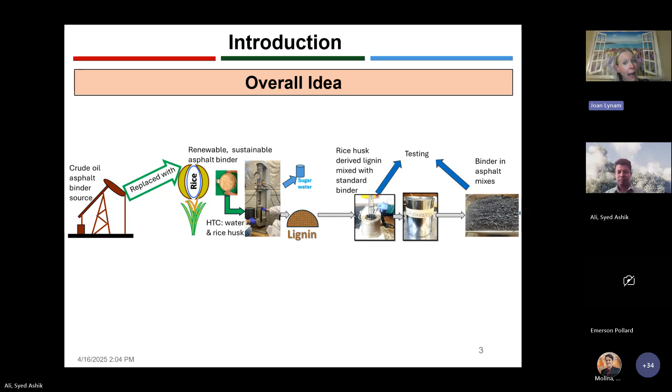The lignin part of the rice husk was then mixed with standard binder and then put in asphalt mixes. And both of these were extensively tested. So that's kind of the overall idea of what we were doing. You can keep going.

So approximately 94% of the roadway infrastructure is asphalt. All right, so that's a lot, really. And usually it's made from crude oil binder. The binders are made that way. It's kind of unsustainable and detrimental.

Eventually, fossil fuel-based asphalt binders are going to be an issue because we're going to run out of fossil fuel. And then at that point, costs will rise up quite a bit. And so we're looking for viable alternatives that are more sustainable. And you can go on to the next one.

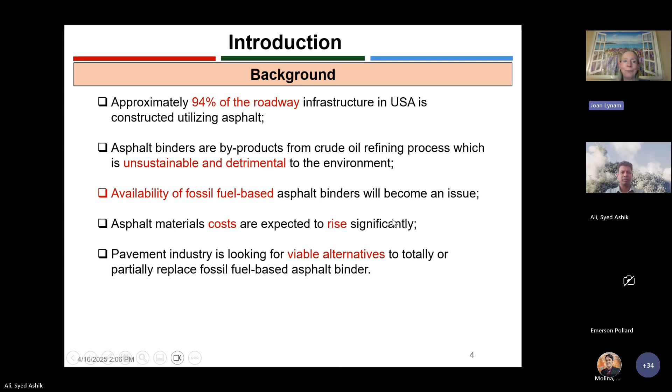So this is different things that people have suggested to replace asphalt binders. One is waste cooking oil by those studies that you see under the reference, and it had some positive things about it. However, you can make waste cooking oil into biodiesel, so there are other things you can do with it. Algae, it had some positive things, but it did tend to have phase separation if you put too much in.

There's natural rubber and latex, and they had some positive things and some negative things, as you can see in the study by Wen. But natural rubber is eventually going to be a problem in our world. The fungus that killed off the rubber trees in South America will eventually probably migrate to Eastern Asia, where rubber trees make latex now. And so that's going to eventually be a problem.

Biochar has also been suggested, and it has its advantages. Cellulose-based fibers also might be useful, as you can see. However, cellulose you can use for a lot of different things, like paper. Really tiny charcoal ash from coconut shells also had kind of a good impact on properties of binder.

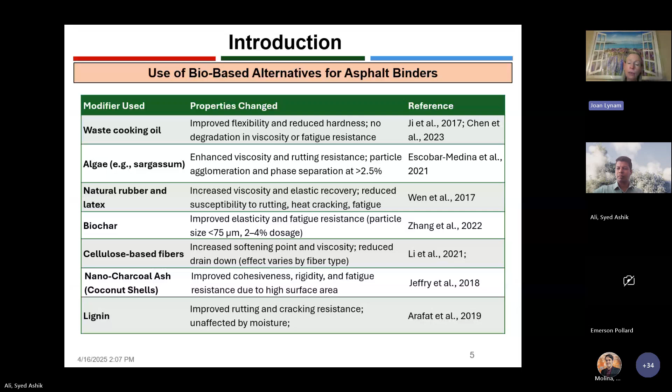But we're mostly interested in lignin. The study by Arafat et al. was actually done at Louisiana Tech with Dr. Wasiuddin and his student and me. And so we were kind of one of the initial papers that actually said, look, you can do this with lignin. So you can go on the next one.

All right. Now, lignin is the second most abundant form of biomass. Now, biomass is just plants, pretty much. So it's the second most abundant form on Earth after cellulose that you make paper out of. And about 50 million tons of lignin are generated from pulp and paper industry. The thing about that is much of this lignin becomes what they call black liquor, and they burn it in their own facility. So it's not necessarily available for us to be using it.

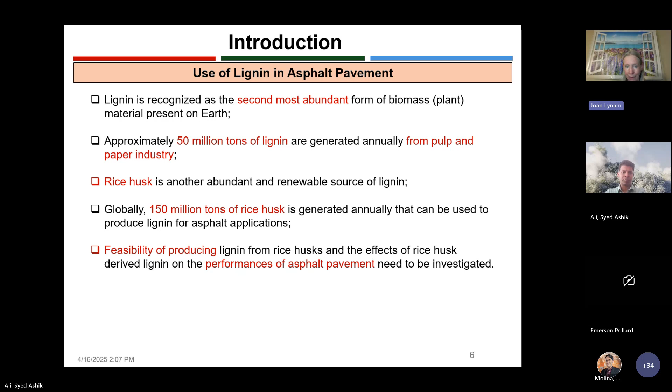And rice husk is another pretty abundant source of lignin. You can see how many million tons of rice husk are generated annually because rice is grown around the world. It's the second biggest crop after corn. So we were thinking about how can we feasibly produce lignin from rice husks, and what will happen if we put them in as a binder in asphalt pavement. All right, we can go on the next one.

Okay, so this is the three major steps. You can see at the picture on the left, that's what it looks like after we do hydrothermal carbonization on it. But there are three steps: pretreatment, extraction, and purification. And the pretreatment can be physical, chemical.

Oh, is there a laser pointer? Oh, that's nice, but I can't point with it.

That's okay though. So you can use acids or bases. You can use physicochemical like steam explosion. So basically you put it and then you change the pressure, suddenly explodes the biomass so that the lignin can be separated. And finally, biological ones. White rot fungi actually can dissolve lignin, but it takes a long time if you do the biological methods. So typically chemical methods are more used, especially in pulp and paper.

You can also do things like organosolv, other hydrothermal processes, acids and bases, and ionic liquids, which I worked with some to make lignin, but the lignin's going to have different properties. Okay. All right. So we're excited about hydrothermal carbonization in my lab, obviously. It just uses water and biomass. So that makes it simpler than many kinds of chemical pretreatments.

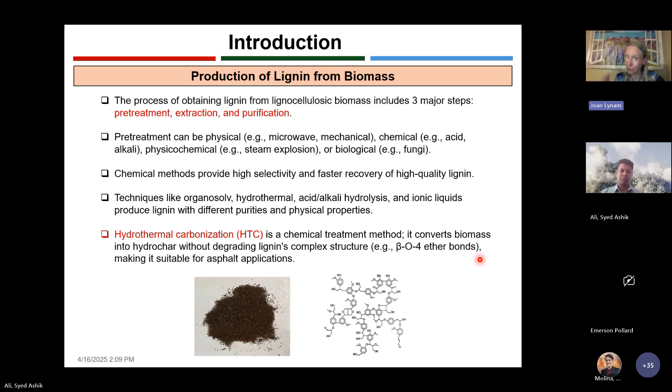And it can take out the cellulose, changing it, as I mentioned before, into glucose, because cellulose is just a bunch of glucoses all lined up. Or hemicellulose, it has different sugars in it too. So you get sugar water out of it, and then you have your lignin, but it doesn't tend to break the bonds, especially the beta-O-4 bonds in lignin, which you can see in the chemical structure on the right. Lignin is pretty much a bunch of benzene rings that are connected in different ways to other benzene rings in a three-dimensional matrix. So that's pretty much what lignin is looking like. If you want to go to the next slide.

Nice thing about rice husks is they aren't really useful for anything. They either get burned in the open field wherever they're produced, or else they get landfilled. Animals won't eat them. Okay, so they're not really useful for anything else. So they're a real kind of a waste, and a large quantity waste.

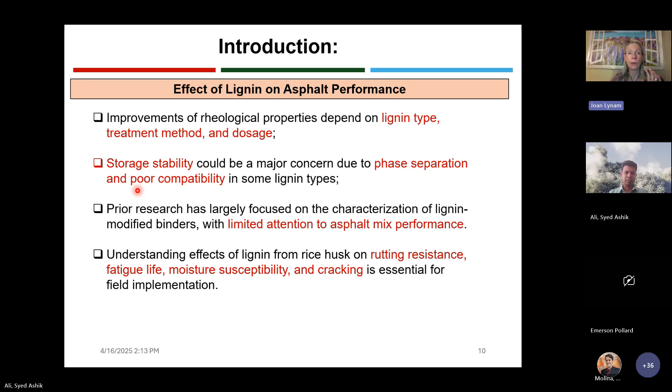So we wanted to study the whole gamut, starting from how we got the lignin to what happened when it was in the binder to what happened when it was in the asphalt mix. So that was what we were excited about studying. So we can go on the next slide.

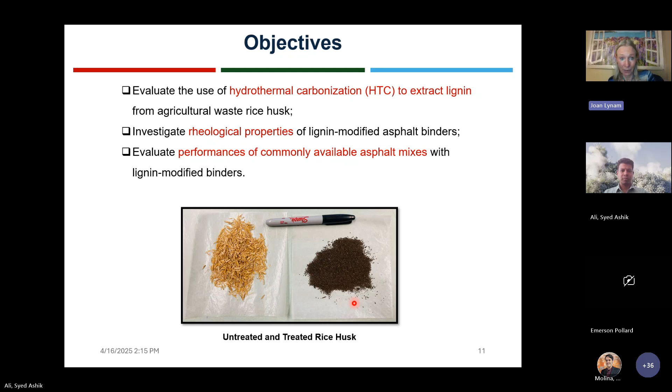All right, so we wanted to do HTC to extract lignin. We wanted to look at the rheological properties and the mixes, just as I said before. The picture you see on the left is what rice husks look like when they're not treated. And then on the right, you can see what it looks like after they're treated by hydrothermal carbonization. So we can go on to the next slide.

And the reason is because this is water at 250 degrees C, which is way above the boiling point, and it's also high pressure. And so that's why you still have liquid water in the process. Then we characterized what lignin we got out of it. We looked at the lignin content, how much lignin we got out of it.

We looked at the fuel value of it. We did some FTIR, or Fourier transform infrared spectroscopy on it. We checked on the cellulose content and the carbon content.

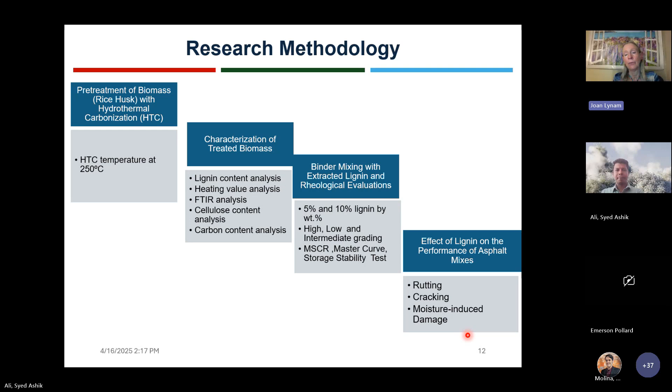Finally, we replaced either 5 or 10% of the asphalt binder with lignin. And we did a lot of testing, high, low, and intermediate grading, MSCR, master curve, storage stability, and that sort of testing. And we did rutting, cracking, and moisture-induced damage testing. And this, Dr. Ali is going to talk more about. So we can go on.

So this is kind of what it looks like, the process. We add water to rice husks with 10 times as much water as the rice husks. Okay, so we weigh it, we put it in a glass liner. We put the glass liner in our reactor, which you can see on the top right. You can see some of my students doing it.

So that's what the PAR reactor looks like. It's a 2-liter reactor that we use. It has a stir and it has a controller to make it go to a particular temperature. It also has a pressure gauge to see what kind of pressures we're ending up with.

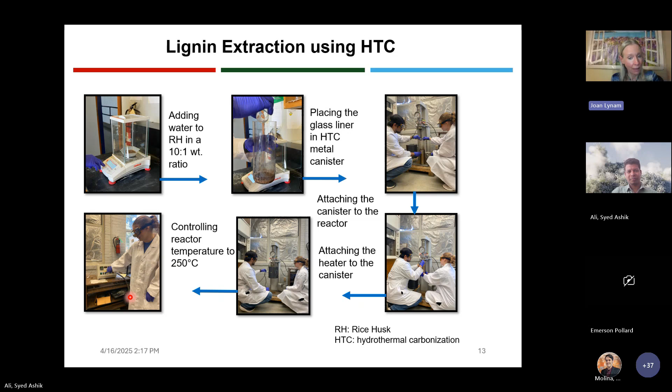We then add the heater. There's a heating jacket that goes around the reactor to heat it up to 250 degrees C. And on the bottom left, you can see the controller. So that's what's happening in that picture. We can go on to the next one.

We do what is called fiber analysis. Fiber analysis basically figures out how much cellulose do we have in our biomass, how much lignin do we have in our biomass. That's kind of what it does. And it's a protocol from the National Renewable Energy Lab. So first we take our product, our solid product. We add 3 milliliters of sulfuric acid to 0.3 grams of it.

We then put it into a 30°C hydrolysis bath for 1 hour. We then autoclave it in our autoclave at 121 degrees C for 1 hour. We then just weigh how much solid we have. The solid that we get is called acid insoluble lignin, okay, AIL. And that's because we put it in the acid and it did not dissolve. So it's the acid insoluble lignin.

And then finally, we take the liquid that was there and we analyze it with UV spectroscopy for acid soluble lignin. So it's the stuff that dissolved out. So that's how we are characterizing our lignin. And we also, yep, you can go on.

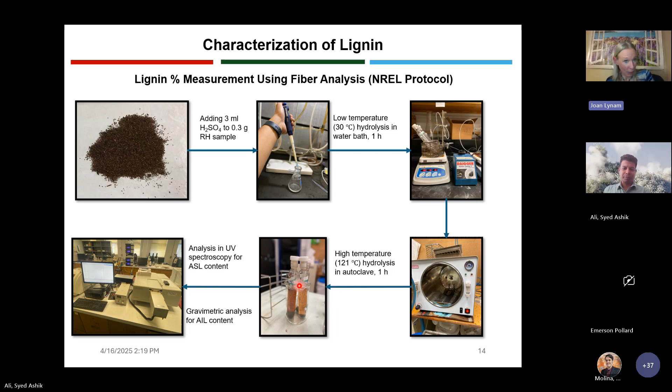Thank you. We then did Fourier transform infrared spectroscopy of it, which can be a little bit hard to figure out, well, gee, there's a squiggly line. How do you analyze this? How we analyze it is we figure out the lignin to cellulose ratio. So at 1515, that particular peak, if you take the area of it, you can then divide that by the areas of a number of other peaks and that will give you what kind of lignin to cellulose ratio you get. So that's how we analyzed it.

The untreated one is the green one. The treated one is the blue curve. And so we calculated those things and we found that in rice husks, if you don't treat them, the lignin to cellulose ratio is about 0.4. All right, but if you do treat it, you get about a 0.95 lignin to cellulose ratio. So it proved basically that we took out the cellulose from these rice husks. So we can go on to the next one.

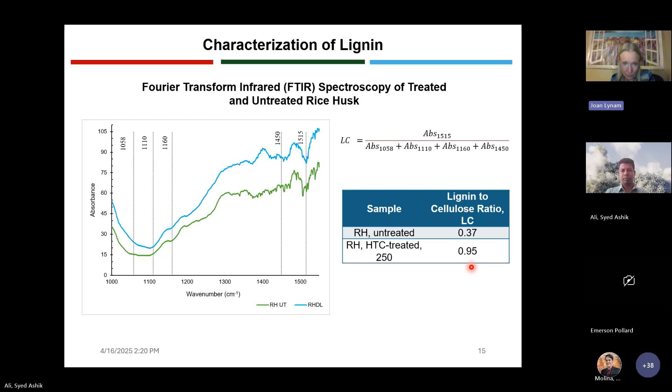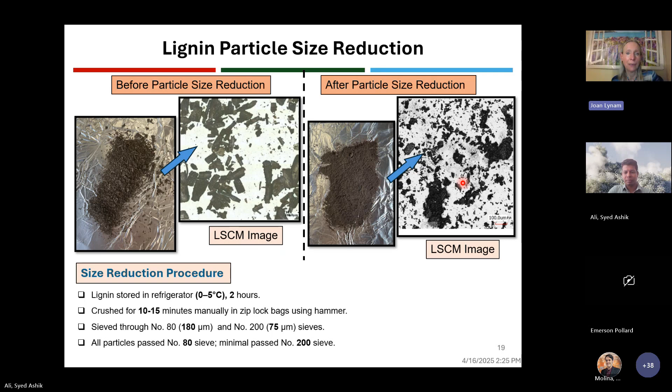And we also checked the melting point of lignin and found that it was around 260 degrees C. Those are 3 different runs when we did differential scanning calorimetry. And so basically, since the melting point is pretty high, it's not melting when we're mixing it into the binder at 170 degrees C. So pretty much it's staying as a particle, it's not melting. And we can go on the next slide.

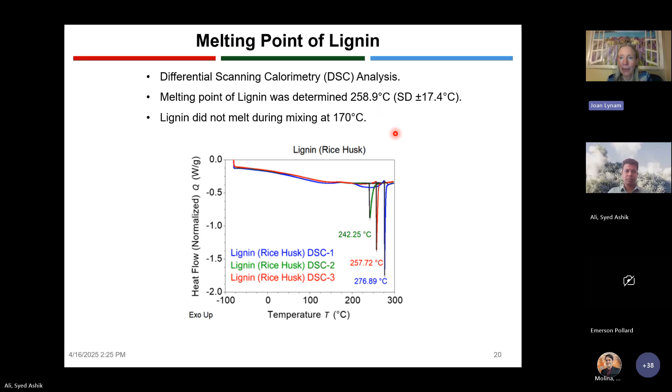And I'm going to turn it over to Dr. Ali, because he's very eager to talk about the experimental plan.

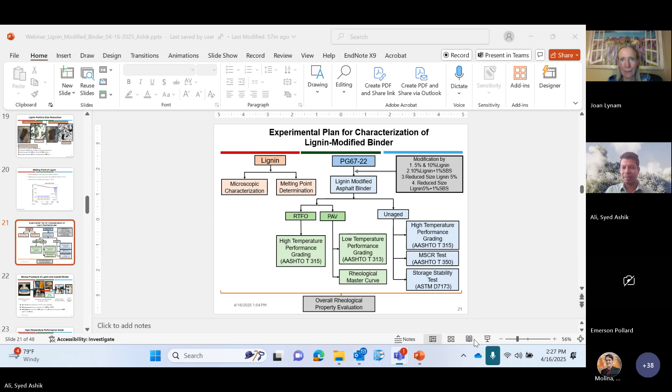Except his microphone is off. Yeah, it looks like you're still muted. I'm sorry about that. Yeah, I could not see. So let me get back. Is it okay now? Yep, perfect. Okay. Thank you.

Thank you, Dr. Lynam, for giving us a very good overview of how lignins are produced. So now we are going to the application part of it, how we can add lignin to asphalt binder, how we can use it towards asphalt mix, and how it is going to impact the performance and properties of our asphalt binder and asphalt mix. So we had a very comprehensive testing approach.

And as you have seen, 3 universities are involved in this. One is Louisiana Tech University, who were the lead. They did most of the asphalt binder testing. Then Louisiana State and the University of Oklahoma both evaluated the properties of the asphalt mix.

So to begin with, to modify our asphalt binder with rice husk derived lignin, we collected a commonly used PG67-22 binder. I know people from Oklahoma do not recognize this because we do not have a PG67 grade, but it's common in Louisiana. So we got that, and we wanted to modify that binder with 5% and 10% lignin.

So the way it worked is that we wanted to replace 5% or 10% weight of the binder with lignin. If we wanted to make 100 grams of modified asphalt binder, we took 95 grams of asphalt binder, and the rest, 5 grams, was lignin. So that's how we worked.

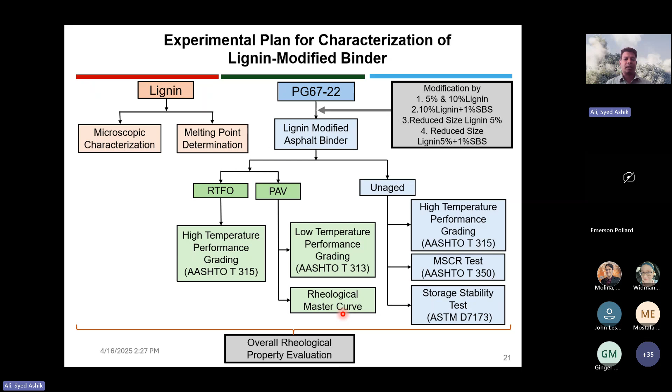And on the PAV sample, which represents the long-term aging, we used the BBR test, bending beam rheometer test, to find out the low temperature properties. And also we conducted the rheological master curve to find out the difference between the neat binder and the lignin modified binder. And then overall, from the whole results, we try to understand how the rheological property has been impacted by the addition of lignin.

Okay, so this slide shows us the mixing procedure that Louisiana Tech has developed and used for this product. At the beginning, obviously, we have to have a liquid asphalt binder. So we heated up the asphalt binder at 170 degrees Celsius. Then we measured the amount of lignin that we need for this purpose. And then we started adding that lignin into the asphalt binder and mixed it using a shear mixer.

So during the shear mixing, you can see this is the high shear mixer that we have used for this purpose. Initially we started with 4,000 RPM for the first 30 minutes, and then we increased that speed to 8,000 RPM for the next 20 minutes to make sure there is a continuous and uniform mixing of lignin within asphalt binder.

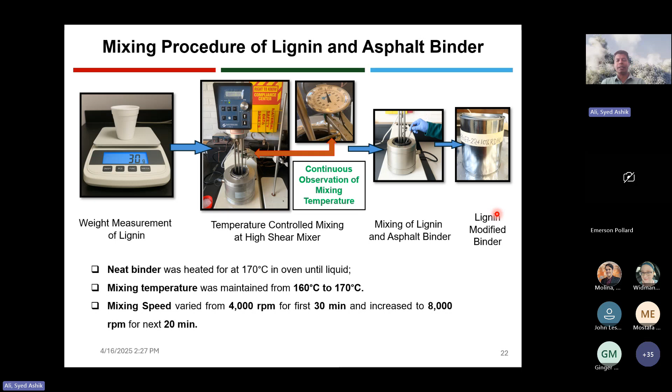And during the mixing procedure, we try to maintain the temperature between 160 degrees Celsius to 170 degrees Celsius. As you can see, we were continuously monitoring the temperature so that it doesn't go below or above that range. So through this process, we were able to produce the binders that we need, 5% lignin and 10% lignin. And also we used the similar procedure when we added the SBS, styrene-butadiene-styrene.

Okay, here are the results for the DSR test, dynamic shear rheometer test at high temperature. The parameter that we wanted to look at from this DSR was G*/sin δ, which is generally used as an indicator of rutting resistance. So we conducted the test on PG 67-22, then 5% lignin modified and 10% lignin modified binder at 70, 76, and 82 degrees Celsius.

As you can easily see from this graph, with the addition of lignin, 5% and 10%, we have seen an increase in the G*/sin δ value. And this trend is true for all temperatures, 70, 76, and 82 degrees. So it tells us that the rutting resistance of asphalt binder is going to improve with the addition of lignin. So we can expect good rutting resistance with the higher amount of lignin.

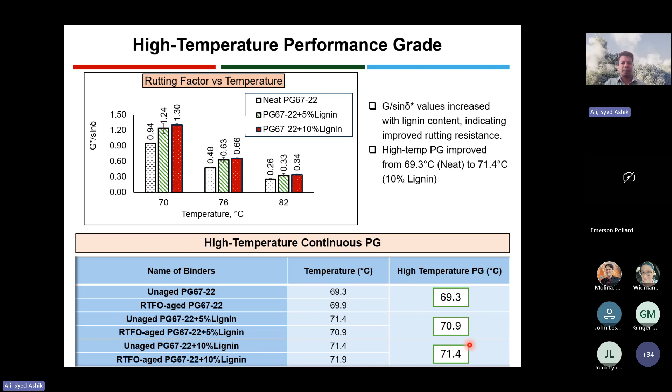At the same time, we tried to find out how much impact lignin could have on the high temperature continuous performance grade. For PG 67-22 binder, the continuous performance grade was 69.3 degrees Celsius. With the addition of 5% lignin, it increased to 70.9 degrees. And when we added 10% lignin, it increased to 71.4. So we can expect around 2 to 3 degrees Celsius increase with 10% lignin, but with 5%, not much, maybe 1 to 1.5 degrees Celsius increase.

Then, as I have mentioned, we wanted to see how lignin will impact the low temperature performance grade. We conducted the bending beam rheometer test and found two parameters. One is called the stiffness or S value. Another one is the m-value, or the stress relaxation. So stiffness and stress relaxation. We conducted the test on the neat and lignin modified binder at -6, -12, and -18 degrees Celsius.

And we found out with the addition of lignin, the stiffness increases significantly. And obviously, as we go to lower temperature, we have seen a significant increase in the stiffness value. For m-value, with the addition of lignin, we have seen a decrease. So what does it mean? At low temperature, the stiffness will go high if we have higher amount of lignin, but the stress relaxation will suffer. So that could be a problem for low temperature cracking resistance with the addition of high amount of lignin. So we have to keep that in mind.

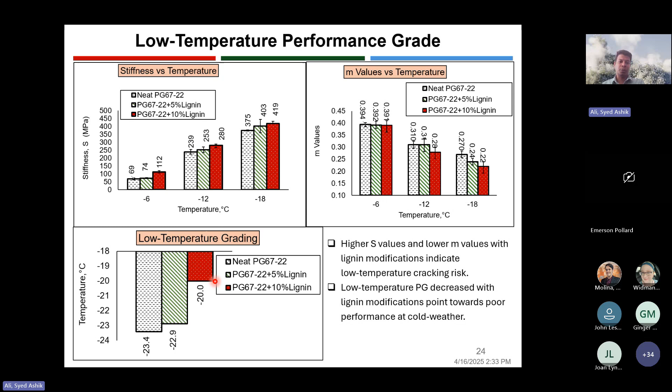We wanted to see how the amount of lignin impacts the low temperature performance grading. As you can see, initially the PG 67-22 binder had a continuous grade of -23.4. After the addition of 5% lignin, it didn't change much. It's still a -22 binder with a continuous grade of -22.9. And when we added 10% lignin, that changed quite a bit. It went down to -20 degrees Celsius, so around 3 to 4 degrees Celsius change in the low temperature grade. So that also indicates that low temperature cracking, or the use of this asphalt binder at low temperature, may be an issue.

Okay, so as we have seen, the 5% lignin is not showing much difference both on the high end and also on the low end. So we wanted to develop this rheological master curve, do the testing at different frequencies, and try to understand, is there actually a difference between the neat binder and the 5% lignin modified binder at a broader spectrum, at different frequencies, and obviously frequency can be converted to temperature as well through some

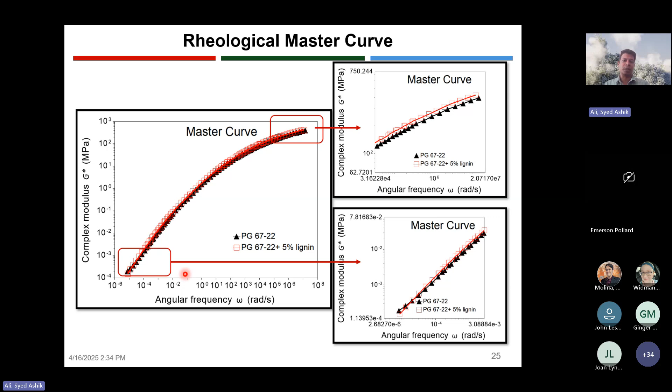superposition principle and stuff. And what we have found is that if we use the complex modulus G* value at different angular frequencies for PG67-22 and PG67-22 with 5% lignin, they're almost the same. There is not much difference between these two at the higher frequency and also at the lower frequency. And we have seen the same thing for storage modulus, loss modulus, and also for phase angle as well.

So the master curve is actually showing that the 5% lignin modification did not significantly change the rheological behavior across a broad temperature range or broad frequency. Okay. So we did an MSCR test, or multiple stress creep recovery test, on a lignin modified binder. The two parameters that we looked at from the MSCR test were Jnr, or non-recoverable creep compliance, and percent recovery.

Generally, percent recovery indicates the binder's ability to return after deformation. It represents the elastic property of the asphalt binder. And we found that although lignin is not a polymer modifier, it increased the recovery a little bit, not much. We can expect a higher amount of recovery than the neat binder, but as lignin is not a polymer product, it did not impact the percent recovery that much.

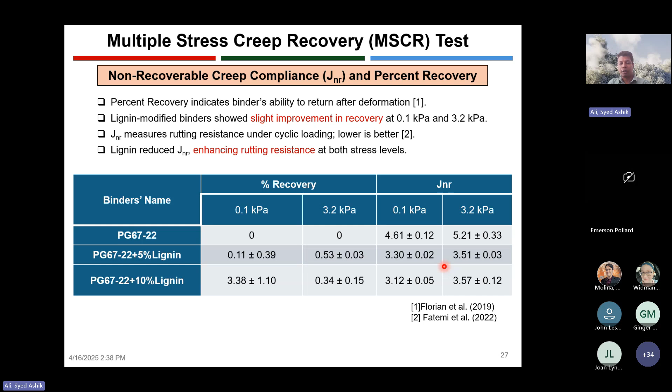Jnr, on the other hand, represents the rutting resistance under cyclic loading. A lower Jnr value is better, right? So we have found that with the addition of 5% and 10% lignin, the Jnr value goes down significantly, and it indicates that the rutting resistance will improve with the addition of lignin. So one important thing we wanted to see is the impact of lignin on storage stability, because several studies have reported that storage stability could be an issue when we want to use lignin.

So we did a test called the cigar tube test using the ASTM D7173 standard. In this test method, we filled the cigar tube with asphalt binder, and then we put it into the oven at 163 degrees Celsius for 48 hours. Then we took it out and directly put it into the freezer at -18 degrees Celsius for 4 hours. After these 4 hours, we took the cigar tube out, marked it at three equal divisions, and then cut the cigar tube into three parts.

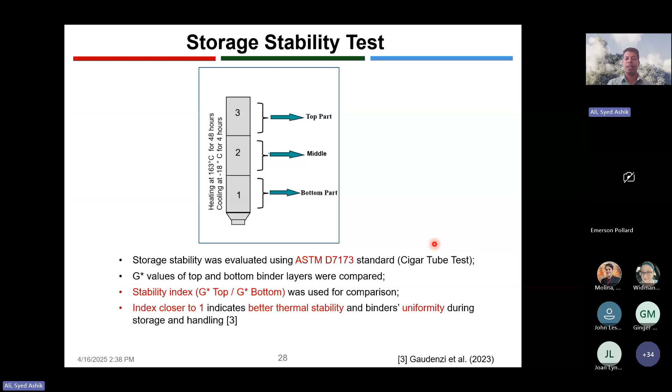And then we conducted the DSR test on both the top part and the bottom part. So from the dynamic shear rheometer, DSR, test, we find the G* value for the top and bottom, and then use the ratio of G* of the top and bottom samples as a stability index. This index was then used for comparison purposes. An index value of 1 will indicate the storage stability of the material, and also that the lignin is uniformly mixed into the binder.

But with 5%, we see that there is some improvement in the storage stability, around 0.67 to 0.68. But still, this is not enough. This is not very close to 1. So what can be done with that respect? We have taken two approaches. One is to reduce the particle size of the lignin, which Dr. Lynam has already described.

So we reduced the particle size, and we added that reduced-particle-size lignin to the asphalt binder, and we found that it improved the storage stability by quite some degree, from 0.68 to 0.76. But again, we wanted to improve it more and wanted to find out what can be done to improve it.

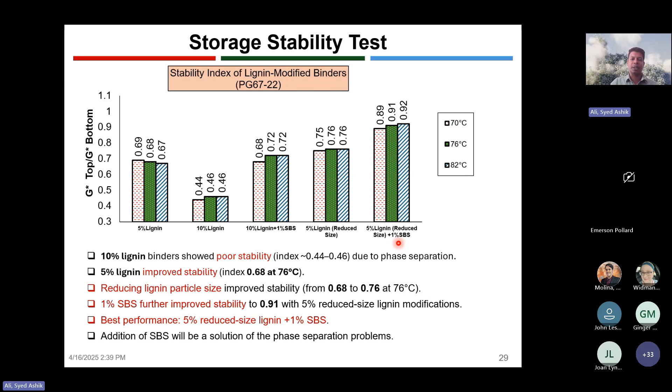For 10% lignin modification, though, the storage stability goes down so much that it is difficult to get it back to the level that we want even with the addition of SBS modification. So yeah, but 5% did a pretty good job. Okay, so that was the end of the characterization of asphalt binder.

As I have already mentioned, Louisiana State University and the University of Oklahoma took over and did the asphalt mix testing. And all these works were going in parallel, because Louisiana Tech was working on the properties of the asphalt binder, and Louisiana State and University of Oklahoma were working on the asphalt mix. Louisiana Tech produced the asphalt binder, and they shipped it to LSU and OU to do the asphalt mix testing.

So after we got that asphalt binder, Louisiana wanted to use it to produce an asphalt mix with a nominal maximum aggregate size of 12.5 millimeter. The control mix that they selected was already an approved Louisiana Department of Transportation and Development, LADOTD, asphalt mix. So it was already approved and already being used on pavement. So they used that as a control mix, and they just replaced the asphalt binder with this lignin modified asphalt binder from Louisiana Tech.

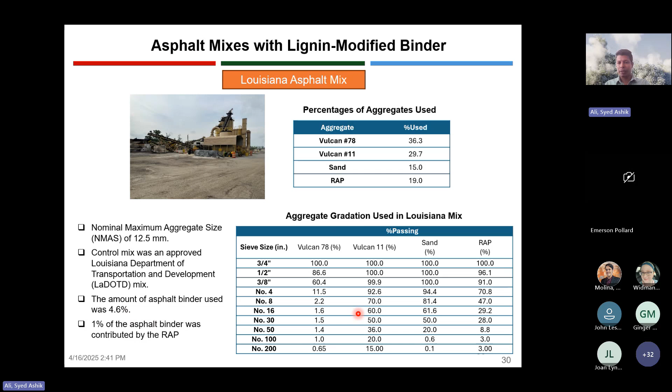You can see the different aggregates that were used in this asphalt mix. I want to draw your attention to the RAP portion of it. So this mix already had 19% RAP, and it obviously had some impact on the mix performance as well. The amount of asphalt binder used to produce these asphalt mixes was 4.6%. Around 1% of the asphalt binder was expected to come from RAP. And here is the aggregate gradation that was used by LSU to produce this asphalt mix.

Similarly, at the University of Oklahoma, we also selected an asphalt mix that had already been done before, and it had a nominal maximum aggregate size of 12.5 millimeter. The amount of asphalt binder we used was 5.2%, and these are the aggregates that we have used. Again, this mix also had around 20% RAP in it.

Okay. So when we added the asphalt binder to our aggregate, the amount of asphalt binder was adjusted to incorporate 5% and 10% lignin in the asphalt mix. So we had to adjust this 5.2% and make sure the whole asphalt binder is 5.2%, where probably 4.9% is the new asphalt binder, and the rest came from the lignin. So we used lignin as a replacement of asphalt binder.

So at Oklahoma, we also tried another thing. We have seen some issues with the performance of lignin modified binder. So we wanted to see whether use of a rejuvenator can help improve some of the properties that we had some issue with. So we used a 2.1% rejuvenator on the 10% lignin modified asphalt mixes.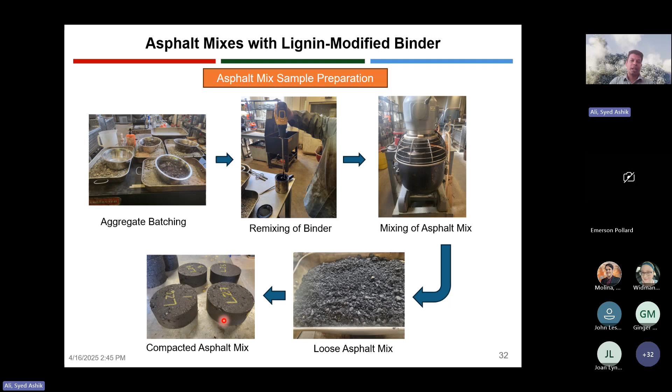We made sure that the lignin is suspended in the asphalt binder, and then we used this agitated, modified asphalt binder in producing the asphalt mix, and this is the loose mix as you can see, and then we compacted the asphalt mix and used it for rutting, cracking, and moisture-induced damage evaluation.

For rutting, we used the Hamburg wheel tracking test, 150 millimeter diameter sample with 62 millimeter height. Test was done at 50 degrees Celsius, and the wheel pass frequency was 52 passes per minute. We used the AASHTO method, where we looked at the rut depth at different cycles and also the stripping inflection point for moisture-induced damage. Texas A&M or TAMU method, this is another method that is getting popular with many DOTs and many agencies. So we wanted to use that too.

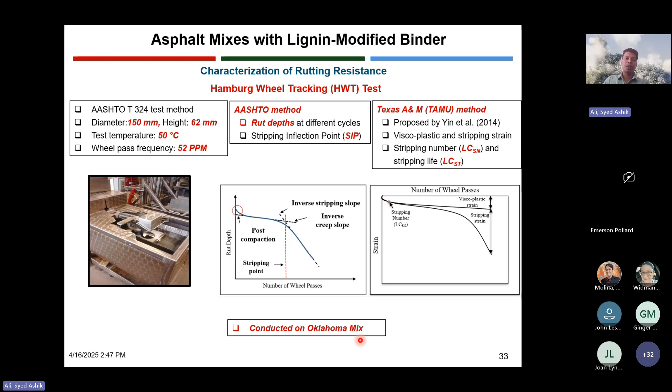Using this method, the viscoplastic strain and the stripping strain were separated, and then we used 3 different parameters. One is called the viscoplastic strain at the stripping number, which was used to evaluate the rutting. The stripping number was used as an indicator of moisture-induced damage, and also the stripping life was used as an indicator of moisture-induced damage. By the way, this test was done only on the Oklahoma mix. We kind of separated. Oklahoma evaluated some properties. LSU evaluated some other properties of asphalt mixes.

We wanted to see how the lignin modified binder will impact the cracking resistance. The test we used for that purpose was IDEAL-CT. ASTM D8225 method was used. After doing the test, we calculated the CT index value of the asphalt mixes using this formula. And I'm not going into the details of this formula here. We'll talk more about the results.

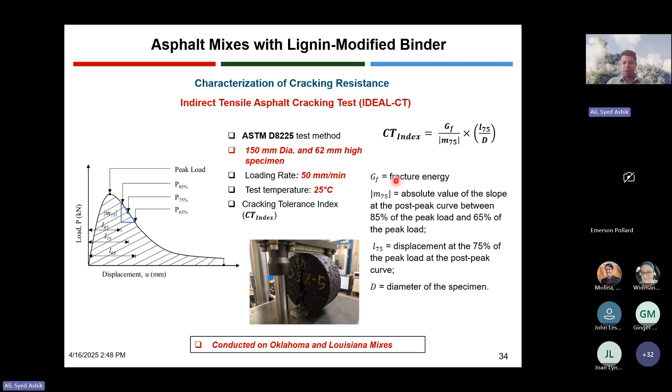We also evaluated the moisture-induced damage characteristic of the asphalt mixes using tensile strength ratio or TSR testing. TSR using AASHTO T283. We prepared a 150 millimeter diameter sample with a height of 95 millimeter. We used 3 for dry conditioning, 3 for wet conditioning. The wet conditioning was done using 1 freezing and 1 thawing cycle. So after determining the indirect tensile strength of the asphalt mix, we compared the strength at the wet condition over dry condition. And this was done only on the Louisiana asphalt mix.

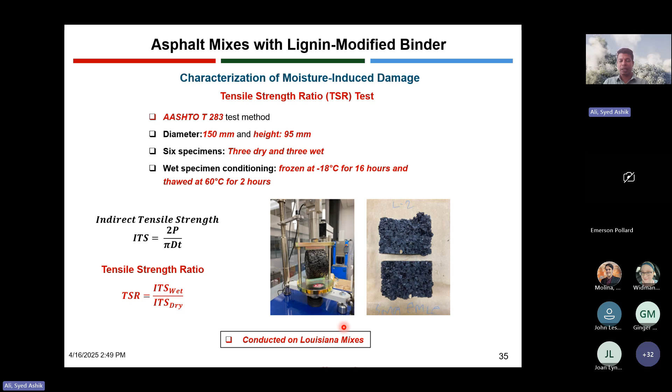The ODOT requirement for good rutting resistance is less than 12.5 millimeter or less than ½ inch after 10,000 wheel passes if the asphalt binder is PG 64-22. So if we looked at rut depth at 10,000 passes, all of the mixes showed very good results. But at the same time, if we look closely, with the increase in lignin modification, we see that the rut depth goes down. For 5%, it was 5 millimeter. For 10%, it was 4.17 millimeter. And we have seen almost the same thing for 15,000 and 20,000 wheel passes as well. So we can expect significant rutting resistance from lignin modification of our asphalt mix.

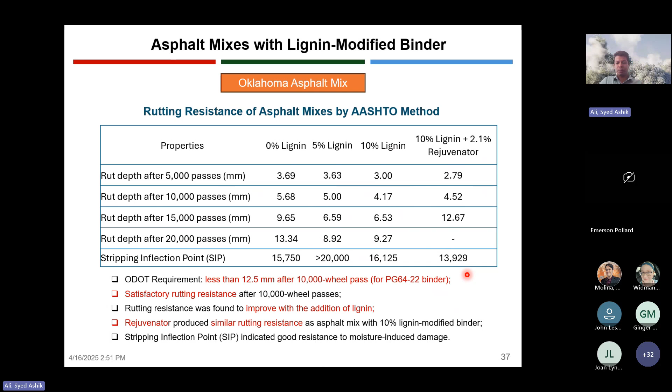The rejuvenated mix with 10% lignin also produced almost similar results until 10,000, but after that we have seen some significant increase in the rutting. So that could be an issue with 10% lignin with rejuvenator. If we look at the stripping inflection point to understand the moisture resistance of these mixes, all of them did a pretty good job. They showed a very high stripping inflection point. The 5% lignin was more than 20,000. The 10% lignin was almost 16,000 wheel passes. And the 10% lignin with 2.1% rejuvenator was around 14,000 wheel passes. So moisture-induced damage wise, all the mixes did pretty good.

If we analyze the result using the TAMU method, there are 3 parameters that we wanted to see. One is the viscoplastic strain at the stripping number. A lower value is good. With 0% lignin, it was 4.97 times 10 to the power minus 6, whereas at 5% lignin, it goes down a little bit. The 10% lignin, we could not calculate. The software that we are using was giving some error, so we could not calculate that. And then 10% lignin with 2.1% rejuvenator increased the viscoplastic strain number. So it shows that the rutting may go higher with the use of rejuvenator.

But stripping number wise, we have found it's pretty good. A higher stripping number shows less susceptibility to moisture. So we have seen pretty good results with the addition of lignin: an increase in stripping number, and also the stripping life indicates good moisture resistance of the lignin modified asphalt binder.

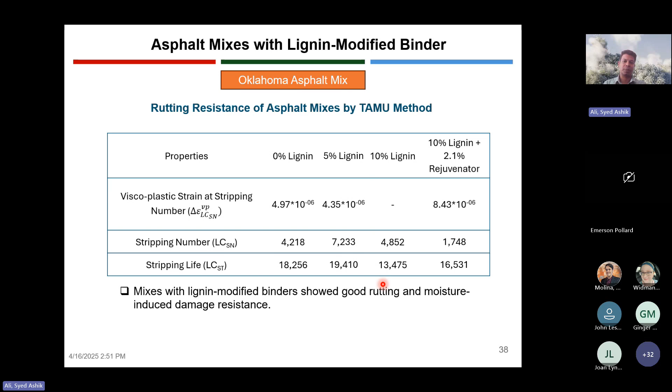And here are the results for the indirect tensile strength that we calculated from the same test, the IDEAL-CT testing. We have seen that for 0% lignin, the ITS value, or the indirect tensile strength, was pretty low, but with 5% and 10%, it went up very high. And with 10% lignin with 2.1% rejuvenator, it came down a little bit. An increase in stiffness of the asphalt mix is actually responsible for the increase in the ITS value.

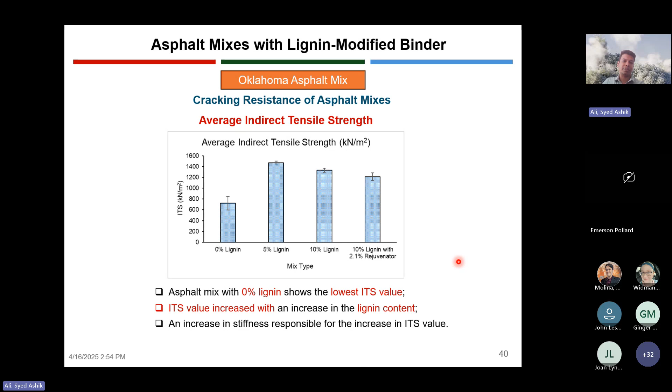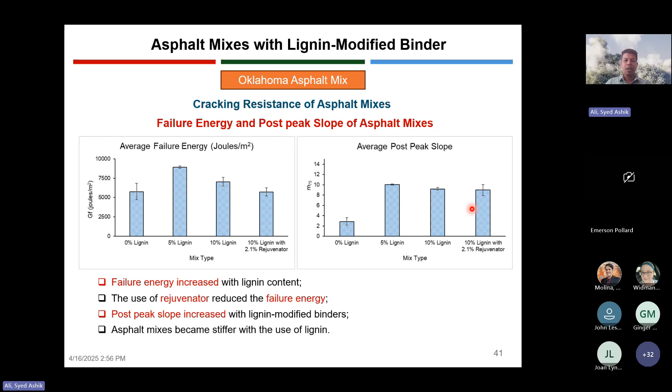Our idea in adding rejuvenator was to see whether it can increase the CT index value. But we have seen that although the mix is not as stiff as the 10% lignin mix, the addition of rejuvenator did not help much in increasing the CT index or cracking resistance.

So we asked ourselves what actually happened that the CT index value went down. One reason was that we used a pretty high amount of RAP and lignin at the same time. 20% RAP with lignin could have been a problem leading to this low CT index value. Also, we used unmodified binder. If we had used a modified binder, some amount of SBS modification, that could have helped. But this was a 1-year project, so we could not explore much.

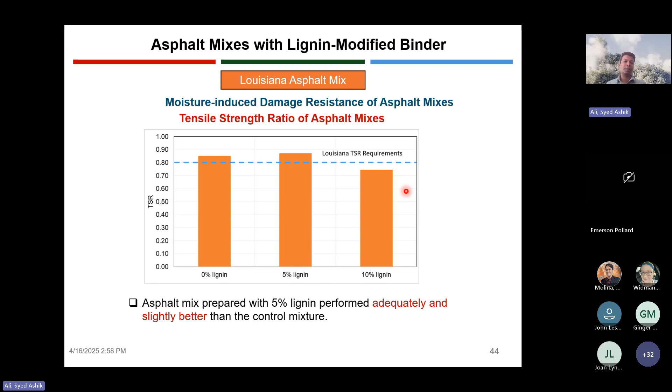So what are our conclusions from this study? Collaboratively, we did a lot of work. We tried to look at the lignin production. We tried to look at the binder part of it. And also we did characterize the asphalt mix performances as well.

We have found that the HTC process can be used with a 250 degrees Celsius temperature to extract lignin efficiently. And then we can use it for modification of our binder and use it in our asphalt mix or asphalt pavement.

Lignin improved the rutting resistance, resulting in around a 2 degrees Celsius increase in the high temperature performance grade if we use 10%, but if we use 5%, we may not see that much increase. We may see around 1 to 1.5 degree increase in our performance grade with 5% lignin. MSCR test and also other tests have shown that the rutting resistance with lignin modification will be improved significantly.

Low temperature cracking resistance could be a problem, but we have seen with 5% it is still okay. But when we go for 10%, the high amount of lignin, it goes down significantly. 10% lignin was found to be unstable. We may need to do continuous stirring to improve the stability of 10% lignin.

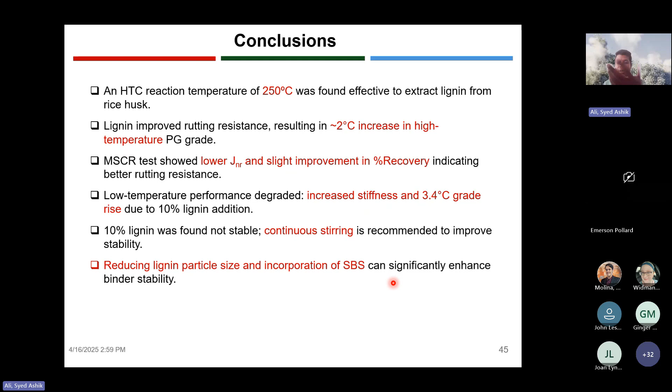And we have found that the use of SBS modification can significantly improve the stability. So that will be our next target, to see whether we can use the addition of SBS to improve the lignin modification. Satisfactory moisture-induced damage resistance was observed from the asphalt mixes with lignin modified binder. Also, the rutting is good.

ITS, indirect tensile strength, increased significantly with lignin. Cracking resistance went down a little bit with the lignin modification. So we can expect to have good moisture-induced damage resistance. We can expect to have good rutting resistance, but cracking resistance could be a problem.

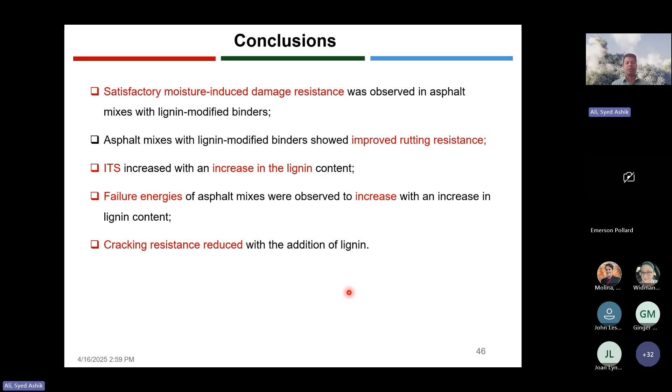So what are our recommendations from this study? We have seen that the lignin is actually acting as an asphalt extender. So minimum binder requirement can be reduced if we use lignin in our asphalt. And also fatigue performance will be the dominant governing factor for asphalt mix design.

If we use lignin using the wet process, during field construction we have to have a mechanism to agitate the modified asphalt binder, so that we have a uniform mix just before we mix it with our aggregate.

But our recommendation is that we should use a hybrid process for design and construction. During design, we can add lignin to the asphalt binder, modify the asphalt binder, and do the design. But when we want to use it in the field, we can use the dry process. Use it through the RAP port.

If we add lignin through the RAP port and have our asphalt binder come through separately and then do the mixing, that could be one way to get away with this agitation and the storage stability problem. Future work is definitely needed to incorporate other types of binder and also varying lignin content.